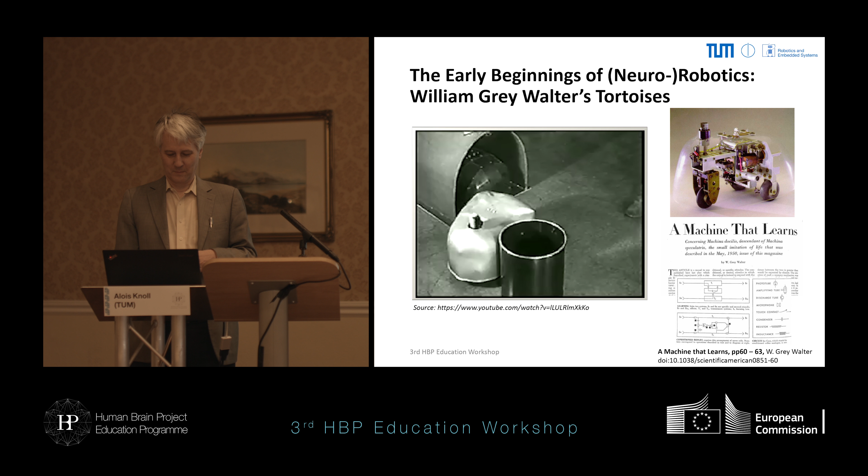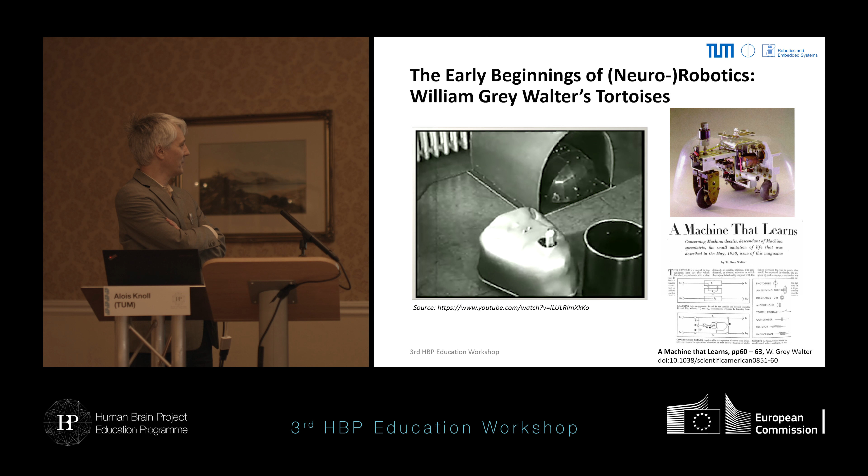This model is named Elsie, and she sees out of a photoelectric cell which rotates above her body. When light strikes the cell, driving and steering mechanism sends her hurrying towards it. But if she brushes against any object in her path, contacts are operated that turn the steering away, and so automatically she takes avoiding action. Mrs. Walter's pet is Elmer, Elsie's brother, in the darker vest. He works in exactly the same way.

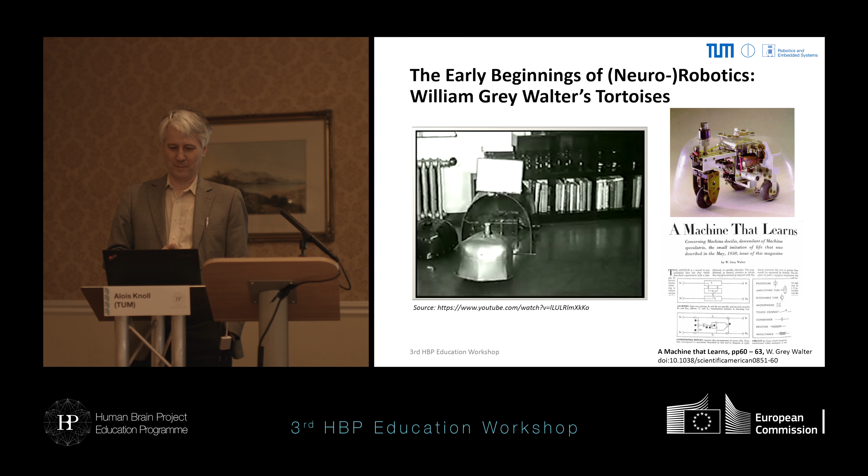What's fascinating is that Dr. Walter says that his electronic toys work exactly as though they have a simple two-cell nervous system, and that with more cells they will be able to do many more tricks. Already Elsie has one up on Elmer. When her batteries begin to fail, she automatically runs home to her kennel for charging up, and in consequence can live a much gayer life.

Okay, so this was 1955, and there is a former professor at Essex University, Owen Holland, who reproduces these as a hobby, and here you can see an Elsie with a transparent body. So that was the state 60 years ago, right? And I mean, if we want to be self-critical, we haven't achieved much more. But that's not quite true. But it's really impressive to see what he was able to do back then with a photocell and a few electron tubes. And the state of technology then.

Okay, so in 2003 then we went on, Floreano and other people did some benchmarking studies on active vision. So that means how do creatures react to visual stimuli. And today, of course, we have large-scale brain simulation, neuromorphic hardware, biomimetic robotics, and so on. If you look at the field in terms of publications, in 2000, we had like 50 per year in this field, and now it's over 700. So it's really something that's growing.

Let me give you a few examples of current research in neurorobotics. Well, first and foremost, our own stuff at TUM, which is, I think, already quite impressive. So this is a mobile robot with two cameras, onboard batteries, of course, and an 864-core SpiNNaker board, right? Of course, courtesy of Dave.

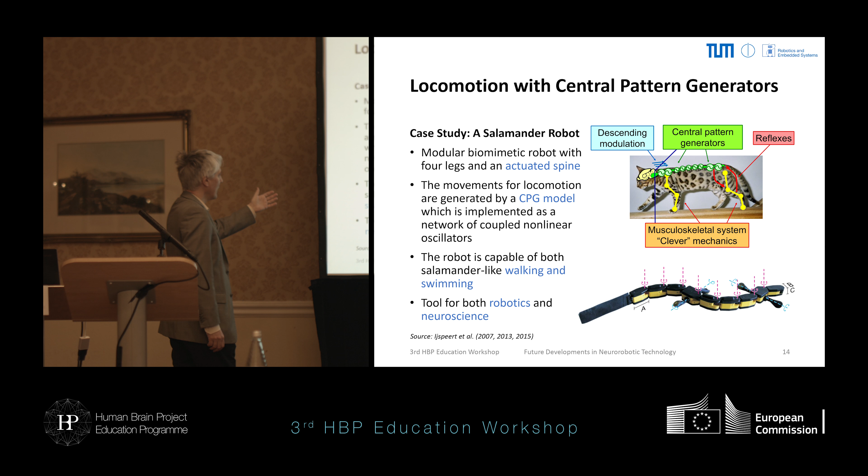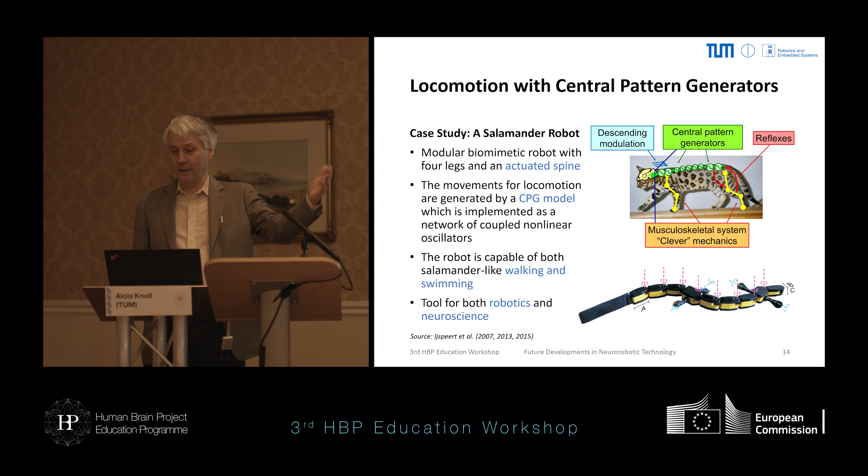And this robot is actually capable of walking, salamander-like walking, and swimming. So this could also be a very good tool. And Auke would certainly also be happy to work with you for robotics and for neuroscience. So here's a video. So here you can see this walk, and then once it gets afloat, it starts swimming in a very natural way.

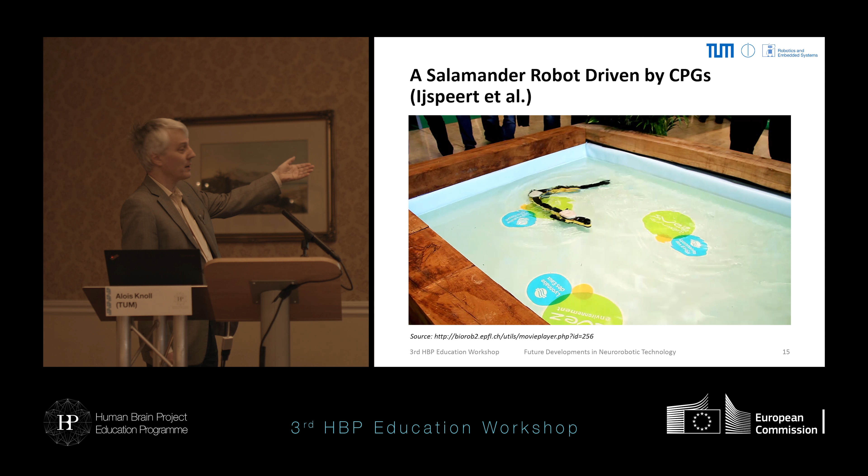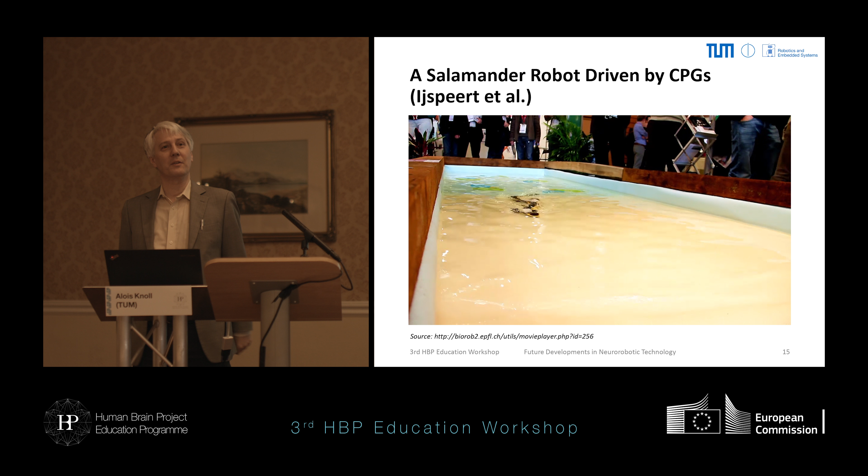I mean, if you looked at it from a few meters further away, it would be difficult to tell the difference between this one and the real one, right? As long as it's in water, and when it gets out of the water, it starts walking again. So I find this very impressive. But it's the result of 20 years of work.

And of course, then the next step would be, and we are working here with Professor Nakamura from the University of Tokyo to do a similar thing, start working on the human body and model the human body with all the muscles, all the tendons, all the bones, which he did. And the resulting model, I mean, he has lots of videos, but I wanted a particular one to present to you, but unfortunately, we couldn't get it.

Suffice it to say that this is probably the most detailed model of the human body available today. And it has 155 degrees of freedom, which I think speaks for itself. And they are adding a neuromuscular model to it, and the resulting behavior is very human-like, very impressive. So if you're interested in that, you're also more than welcome to talk to us.

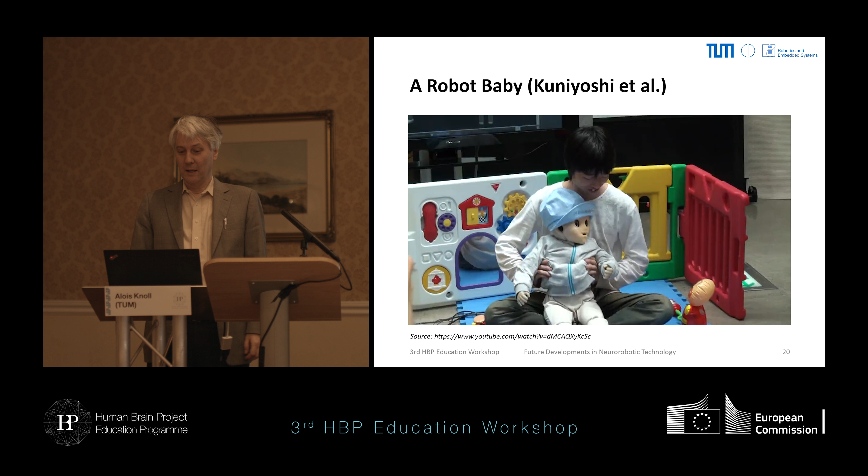So here's an example of a learning baby. This is Kuniyoshi's baby, right? You can't see this, but it has ears, eyes, and lots of sensors around the skin. And you start with an empty network, but then after a few minutes, when you touch it and there are stimuli, optical stimuli, and a bit of noise, it starts reacting. And again, if you're interested in this, I can only refer you to Kuniyoshi. Very interesting work, also a very good example of neurorobotics.

Okay, so it's SP10, our own sub-project in the Human Brain Project.

We started, as you know, with a motivation that we wanted to build more intelligent robots, like many other people, right? So we are in the mainstream of robotics development, and here are the skills that we would like to see these robots have in the future. So perception, clearly out-of-the-box navigation. You buy a robot, you unpack it, you want it to be able to navigate in your flat immediately. Of course, that's extremely difficult.

Humans, with their brains, need many, many years to arrive at the stage where you can really navigate in any hallway in the world, right? If you try to teach a robot what a hallway is, that's already quite difficult. So maybe you can train it to navigate in this particular hallway, but then you have that hallway and the whole thing fails. So that's a real challenge. Working with others, goal-oriented behavior, decision-making, and maybe one day up to the level of consciousness.

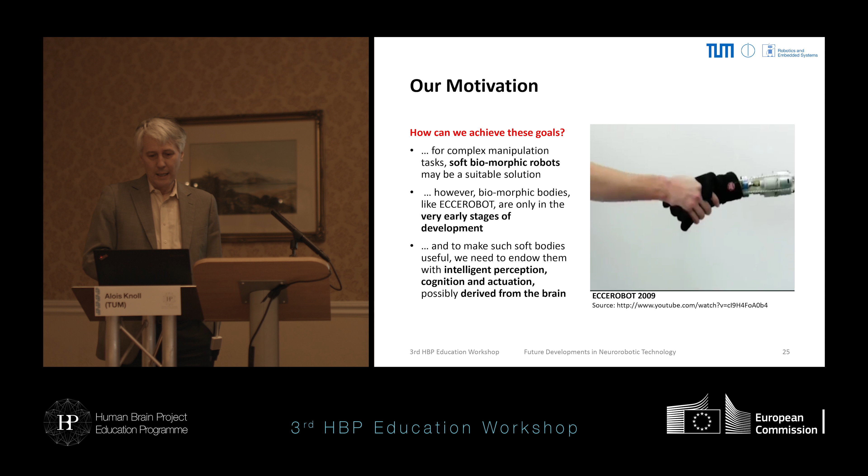And once we have an embodied robot, then we can maybe really arrive at the point where we have intelligent perception, cognition, and can really make a connection with brain research. So our mission is that we want to contribute to theory, right? I once said we want to develop a Hilbert program, in all modesty, towards the ultimate cognitive robot. But on the practical side, we would also like to design modular brains for modular bodies, because clearly you do not always want a full humanoid robot.

I mean, would it make sense to build a humanoid robot to operate your vacuum cleaner? Or might it be better to build an intelligent vacuum cleaner in the first place? Probably the second option would be the choice. But then what parts of the brain would be useful to integrate into an intelligent vacuum cleaner? Maybe a skill for navigation would be useful, but also an audition module, so that when you come in and say stop, or start cleaning now, the robot would listen to you and do what you want. So that's the question.

So the purpose, and I'll come closer to this platform aspect, is to really build an appropriate tool chain for connecting brains to robots, and this is what we are doing. So this is the tool chain. We first want to define a system that we want to control, so a body. It could be a real body, or a virtual body, like this mouse, which is our SP10 virtual mouse. Then we would define the desired level of simulation granularity, pick the model, instrument and align it, so determine the signals and actuators and motors in the body that we want to connect with our simulated brain. And then we would execute the experiment.

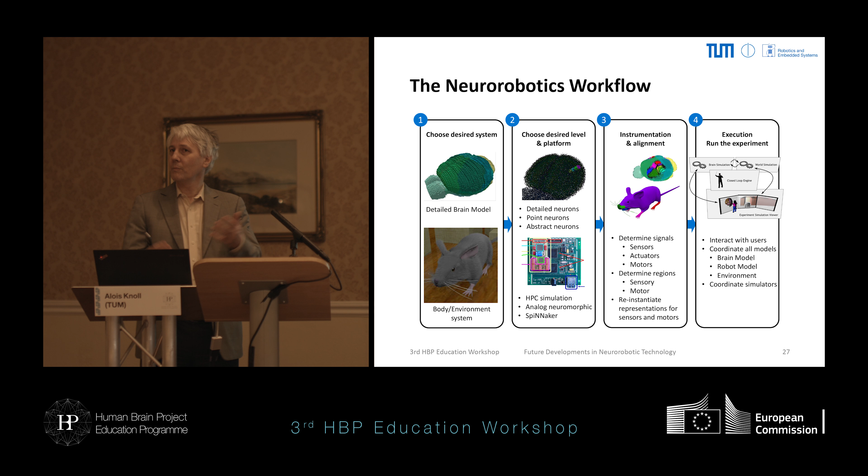It could be a scientific experiment, but it could also be something that would be useful in your household. An example of this was our first real neurorobot, the ball balancer, a very simple robot, but it has everything we need. It has a dynamic vision sensor, like the one I showed you on this mobile robot with the SpiNNaker board, a ball, 2 actuators, so only 2 degrees of freedom, very simple. But already a SpiNNaker-based controller, a SpiNNaker board with 4 chips, of which we used only 1. So there seems to be some mismatch, but it's always good to have more computing power than you need. And then, it's a Zurich sensor, yeah.

Yeah. Like on the other one, it's a silicon retina. So it's actually from the Institute of Neuroinformatics, which is a little bit ironic because it's led by Rodney Douglas, who's not a great supporter of the HBP, to say the least. But we're using the... Huh? We cooperate. Yeah, which is a positive development. So anyway, we were using this together.

I mean, this was basically Professor Conradt's work at TUM. And this is the hardware. What you don't see here is, of course, the model that we're using to control it, and this is again this Blue Brain column that Felix presented to you yesterday. We simplified this a lot.

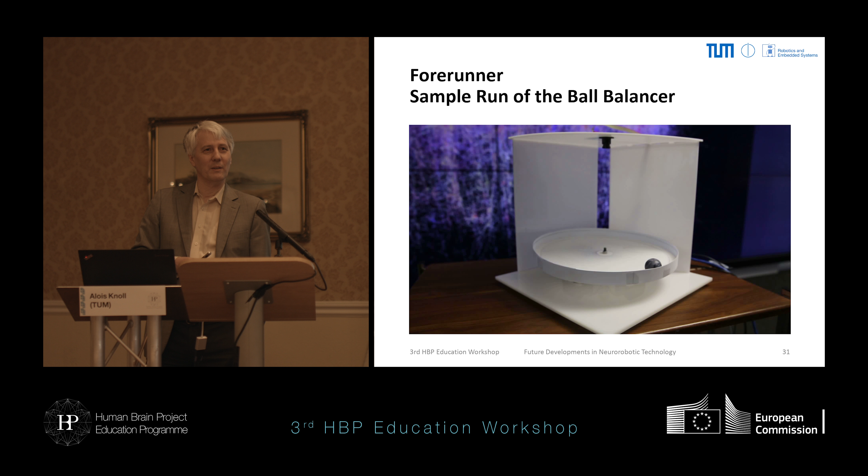And then what we did was we simulated this, right? So the task is really to balance this ball in the middle, and then here is a video of the machine. And as you can see, it learns, or it gets trained in the model, in the simulation. Then we transfer this program to the actual machine, and after a few tries, it balances. Well, of course, this runs because it's a video, but it also runs in reality, like this, so we can show you.

Okay, let me now come to the platform. What are we providing to you? What is our vision? The vision is we will give the brain models a body. And the most important metaphor is the closed loop system. So we have an input. So the system lives in an environment. As I said before, it could be a virtual environment, it could be a real environment, it could be this room. Right? So we model this room.

The robot system has sensors that pick up the information from this room. It has a certain goal, so it should develop a goal-oriented behavior, picks up the signals in this room, processes them in a certain way in the simulated brain, on the SpiNNaker system, for example, and then it translates these stimuli into action.

In other words, it drives around, it flies around, it moves around in this room, and that, of course, again changes the perception, so you have this closed loop, like we observe in almost every creature that has senses, a cognition unit, if you will, and actuators. Right? So this is our vision. We want to build these closed loop systems.

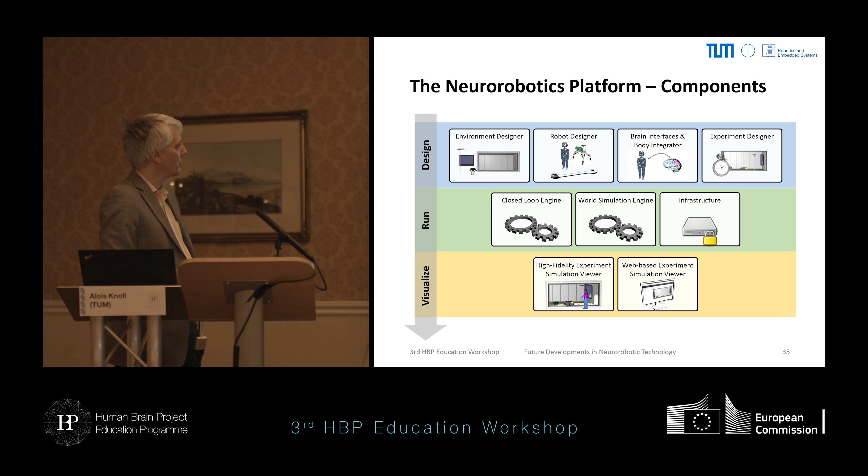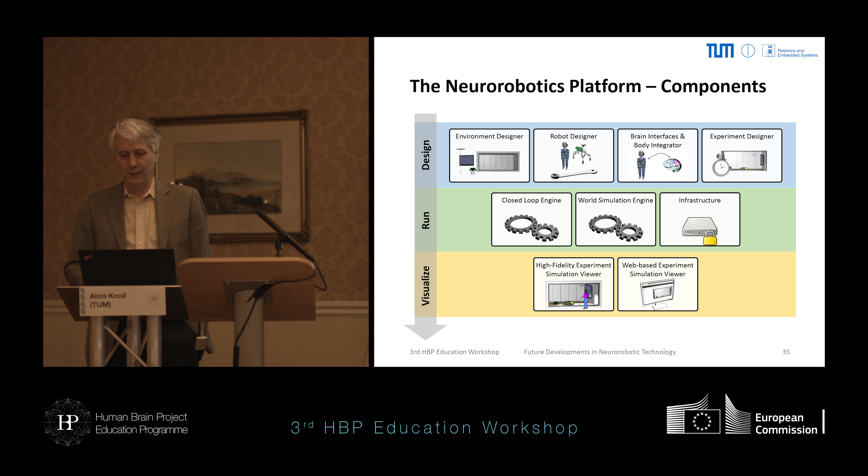An industrial robots engineer might not want to use this, but of course nobody is forced to use it. Then we have the closed-loop engine, the world simulation or the world simulator, and then a little bit of infrastructure which remains hidden from the user. And we have different kinds of viewers. So it could be, as I said, any web browser, but it can also be high-fidelity simulation viewers. We are using, for example, the video wall in Geneva as an output device.

We have a number of bodies already available. So we have a model of the iCub, which is the result of a long tradition of European projects. A lot of money has been invested into the development of the iCub, which is a robot baby. It's about this high. The development must have been around 2004 or 5. Then we have the HBP Mouse. This is a model which is not, we have better models or better visualizations of the model.

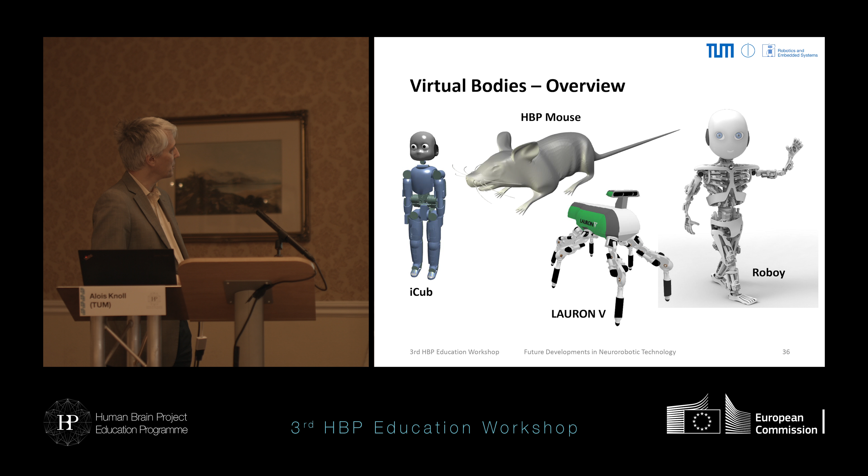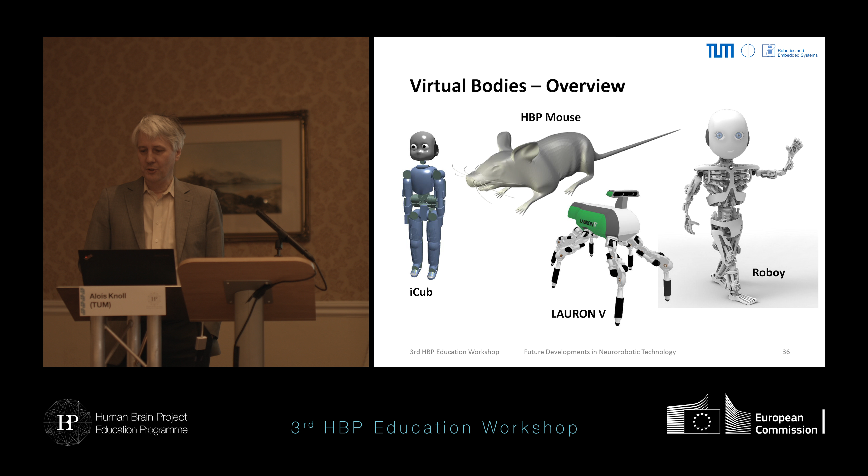We have Lauron from KIT, Karlsruhe Institute of Technology, which is a hexapod robot already in its 5th generation. That development started in the late 80s. And of course we have Roboy, the robot that we have developed together with the University of Zurich, Rolf Pfeifer, and his team.

Okay, let me give you a short overview of the HBP mouse, because this is something that is already available. So we have developed this mouse body, and we are at the moment developing a much more detailed one. This is a rather rough one, and a first 200,000 neuron mouse brain model, which was basically developed by the brain simulation people, Felix and his crew, but we are using it actually quite successfully. Here you have an image of the mouse, right? This is just the body. As I said, it's a relatively rough model.

And this is the mouse, just the body without the brain, so it does nothing, right? It just falls on the floor, but you can see that it's elastic and it has a rather natural appearance already. But as I said, we are working on much better models at the moment. So this was 2 years ago.

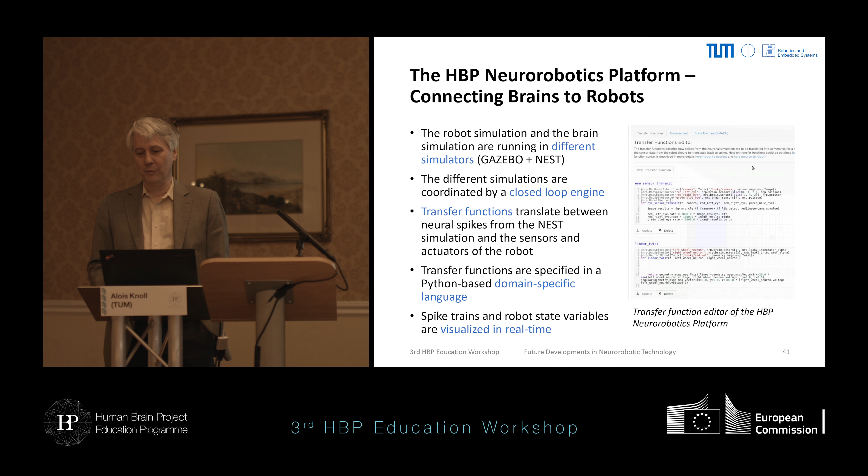For example, develop transfer functions, or first of all, even develop the concept of transfer functions with which we glue together the NEST simulation and the sensors and the actuators of the robots, because NEST in itself is just a simulator. How do you connect the simulator? And then how do you connect the simulator to work in real time, or at least in simulated real time, with the body? That's the kind of stuff that we've been working on. But now it is almost ready for release, right?

So here you have, for example, an overview of the closed loop engine as one of these things that glue together the simulators. We're using NEST for the brain. We're using Gazebo for the simulation of the robot and the environment, and we're using...

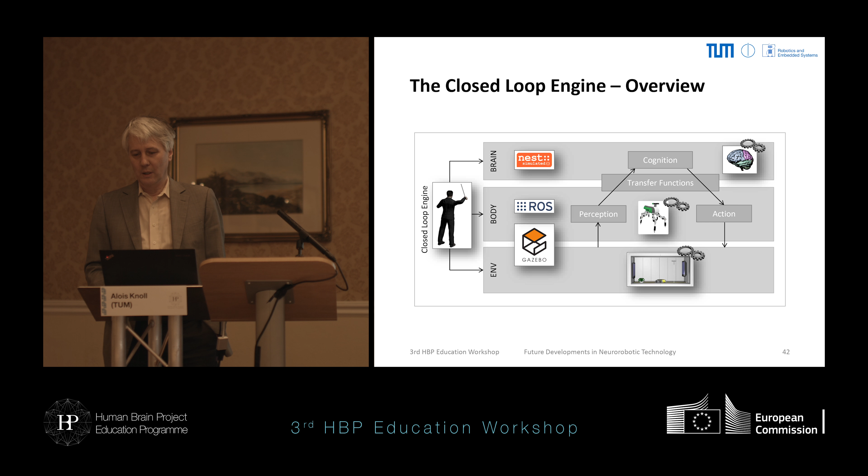We have to use ROS with all its deficiencies for running the robot system. We can use that, as I said, in the simulation, but also in the real world. So this is basically the data flow, maybe not so interesting, but we started out with a very simple example: Braitenberg vehicles, probably the simplest robot you can think of.

This has 4 wheels. It's not really very humanoid. It has 4 wheels, has 8 neurons, right? And the purpose, of course, is like with C. elegans, phototaxis, follow a stimulus, right? So we have this room. Let me show you this video briefly, but before we start, I'll explain this to you. So we have simulated this room with 2 monitors that change their color, for example.

So this is the robot, the Braitenberg vehicle, and here you can see the simulated spike trains of these 8 neurons. This is a rather coarse, rather rough simulation. We can do much better now. This was done roughly a year ago, but basically it shows you the whole environment. So we have this room. The robot roams around, looks for...

So we change the color, and then it looks for red or it looks for blue. And down here you can see 8 tracks of the spike trains, or the recordings of the spike trains of these 8 neurons. And then, of course, you're free to change whatever you want, right? So now you can change everything, every parameter in real time. You just change a parameter, and you can then observe the change in the behavior of the robot.

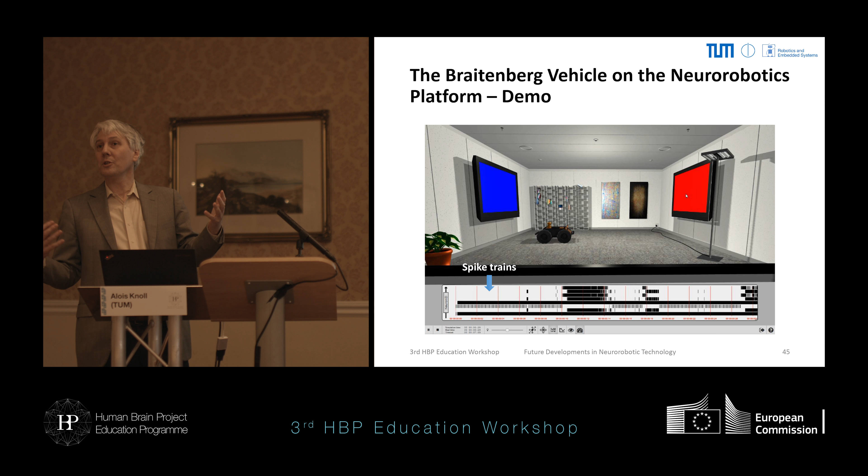So this was a year ago. Now we also have, for example, the iCub standing in that room, and this is about the achievements until last September. It's a pity that we don't have the CodeJam people here, but in Python, you can change everything. And this experiment was basically active vision on an iCub. You can change it, you can observe the eyes, you can see what it sees, everything. It's all open because it's all in simulation. You can look at everything, down to every neuron.

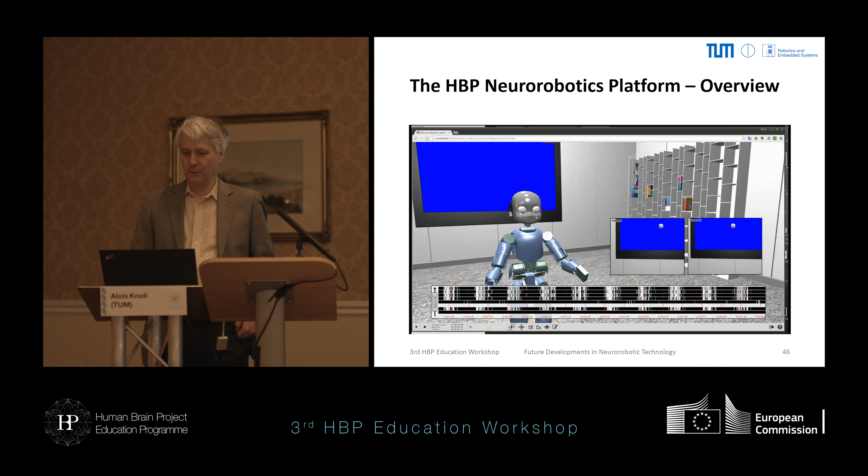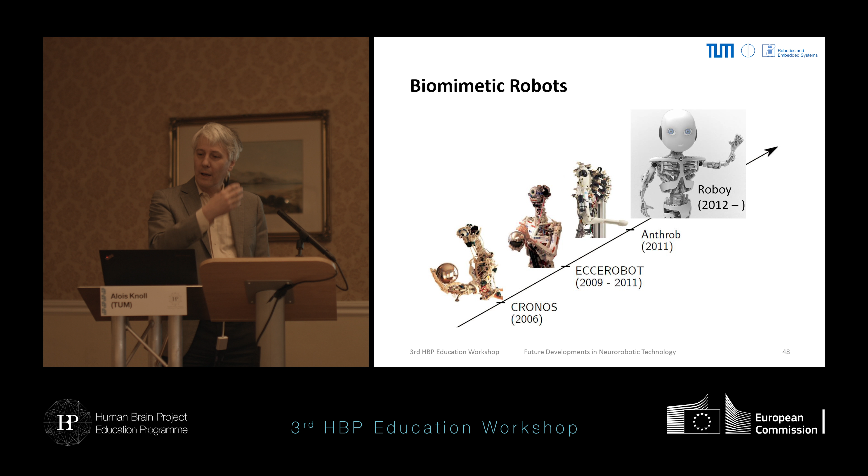So, what is the future? Well, the future is, of course, first and foremost the body development. We started with ECCEROBOT back in 2009. We're now working with Roboy and the follow-up robots. We are firm believers in this theory of embodiment, right? So the morphology of the body shapes the interaction with the environment.

A lot of computation can be offloaded from the brain if you use the right body, right? So if it has the right flexibility, the right plasticity, and so on, then there's a lot of stuff that you don't have to do in the brain because it's already done by the body, because the body adapts to the environment without any computation, right? Some people call this morphological computation.

We'll continue working on these bodies because we think that generating highly realistic data from these bodies that have these human-like dynamics makes it much easier for you and for us, of course, to arrive at better simulations, much more realistic simulations, right?

We are working on artificial muscles. This arm, by the way, is a really very unique and powerful design. We've been working on this for many years. It has a spherical joint up here, like the shoulder. It's soft. It's back-drivable.

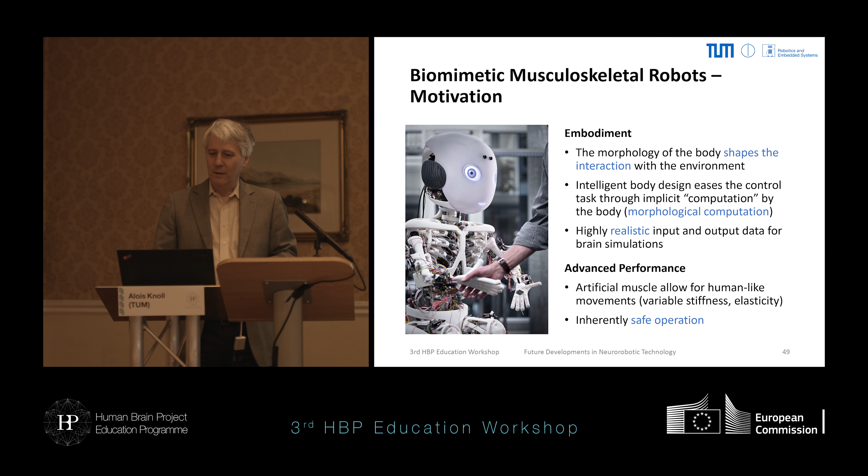We also have the models, right? For example, this one was our first model back in 2009, the Eccerobot model. It was not easy to develop simulators for these mechanisms because it's all highly non-linear. Everything else available at the time was for linear kinematics, but with these tendons in all places, it was really difficult. But you see, this thing looks quite realistic, and it actually was quite realistic.

We then went on to build the arm that I just mentioned. So this is this design, right? It's very similar to the human arm, and the motion is very smooth. It took us 2 PhD dissertations. 2 PhD students worked on this for 4 years to design the controllers. So a lot of work has gone into this, even though it looks very natural.

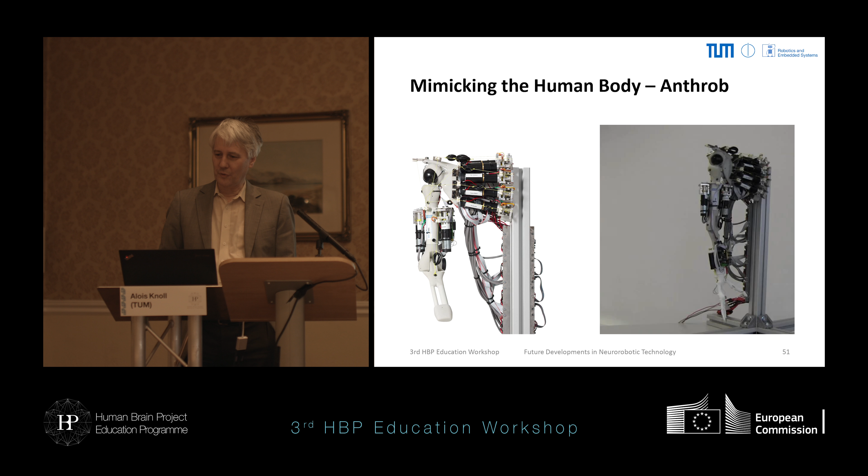But that's, by the way, also a big problem in robotics, right? The more natural it looks, the less people understand what this is all about. I can do this, so it must be easy, exactly, right? And then this all went into the development of Roboy. Here's a video of Roboy.

Most robots have motors in the joints, right? But humans obviously don't have motors in the joints, but we have muscles and tendons that are pulled over the joints. And what we try to do in Roboy is not only replicate the superficial appearance of a human being, but the inner structure with joints, bones, muscles, and tendons.

So maybe we can briefly have a look. So hi, Roboy. Of course, it doesn't answer because this is not a video, this is real. Okay, it should have said hi. Can we have a close-up on the shoulder? Hi, Roboy. It's a pleasure to meet you. Yeah, this is again this arm that I mentioned to you. Okay, very good. Unfortunately we don't have the time, so we have to stop this here.

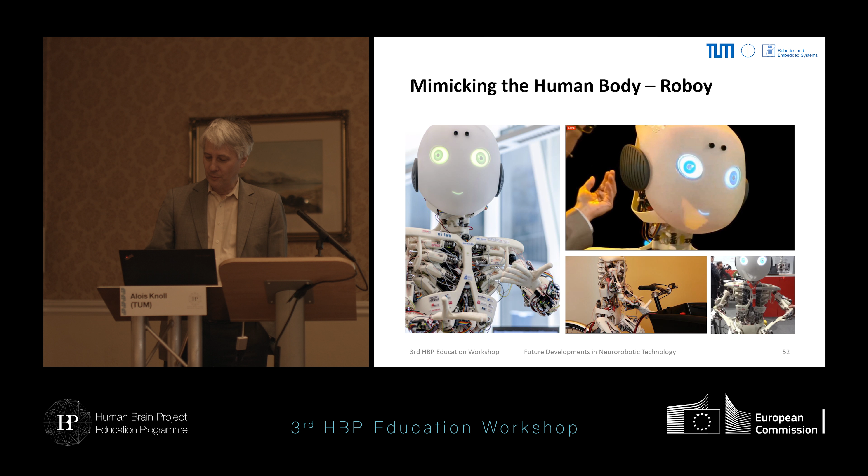But it's quite funny to watch Rolf explain the Roboy, and it's been a major success. It's been around the world. Everybody likes it. There was a show in Zurich where 200 people were actually lining up, even paying for seeing Roboy, even though it doesn't do much. There seems to be a tendency that people like these artificial creatures.

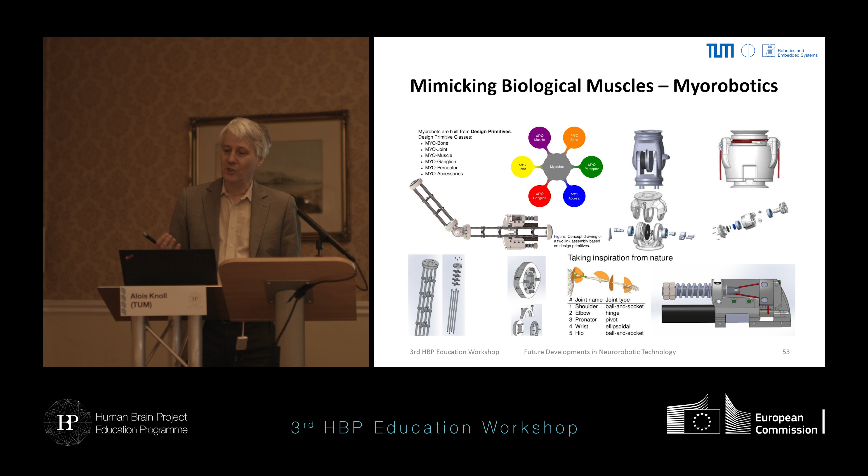So then we went on, and in the next European project called Myorobotics, we developed a kit, a modular design with which we can build all kinds of bodies. For example, this one. It's actually a very simple mechanism with only 1 degree of freedom, but you can change the elasticity, basically every parameter, and do interesting experiments. You can even use it as a catapult. It's so soft, and you can throw a ball.

You can build a thing like this, a quadruped, which of course is too heavy to walk, but at least it can show off the different sorts of gaits and so on. But this was also 2 years ago. We are much better than this now.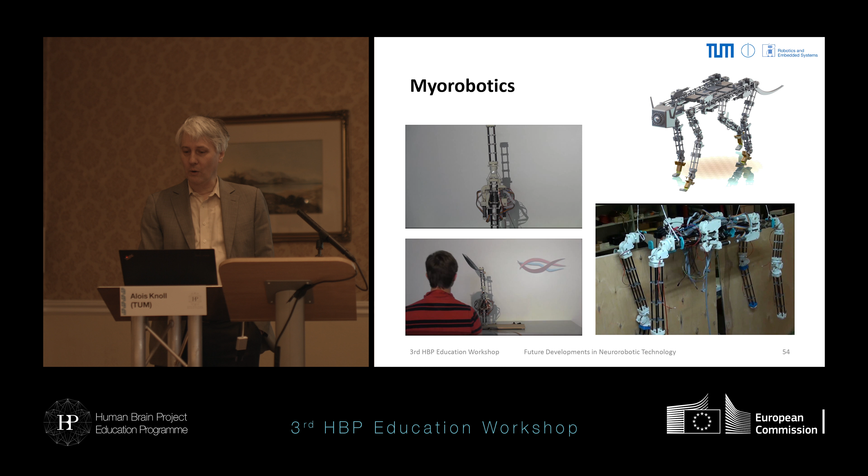So the intermediate summary is we have these bodies, we are working on them. We think that musculoskeletal robots are ideal and even essential for meaningful interaction with the environment. They are a good basis for brain simulations, or for acquiring data for brain simulations, and for applying what we know about the brain using artificial controllers in robots. They are ideal for us as supporters of this metaphor of embodiment. And we can add special features like variable stiffness, inherent compliance, and so on.

But the problem is classical control algorithms are not suited, they are not available. So we have hope, because we're using what we know about the brain for controlling these bodies, but it's a long way to go. And of course, appropriate learning techniques are required, and that will be my last chapter in the last 5 or 10 minutes.

What are we going to do about learning? Well, we are working on learning. Florian Walter, my PhD student, who unfortunately couldn't come here, is the head of this learning group. We need the learning. But the problem is, what we have at the moment with all the deep learning and stuff is not enough for us.

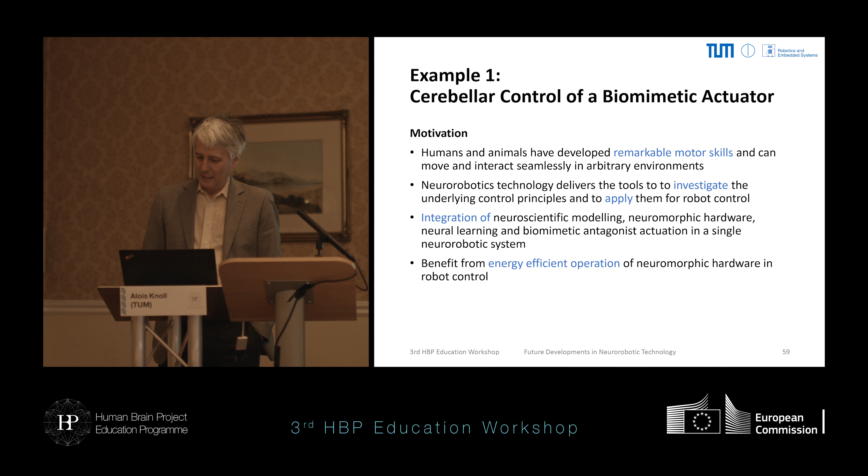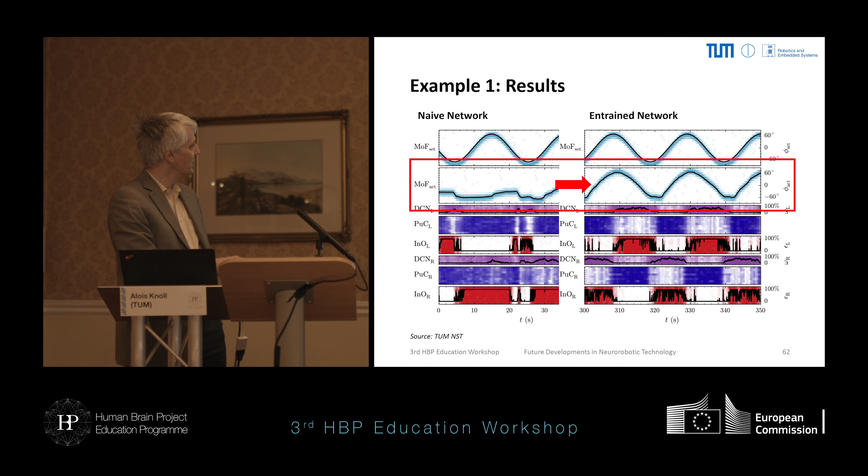Unfortunately, I'm already 1 minute behind schedule, so I should be quick. Just as an overview, we're using a model developed by the University of Granada, Eduardo Ros. I can't go into detail, but clearly this is a closed loop system. And if you look at the arm, this is the set point over time, the profile that we want. We want to move it like a sine wave, and this is the actual movement in the beginning. We can look at all the signals in the cerebellum, like I showed you with the iCub.

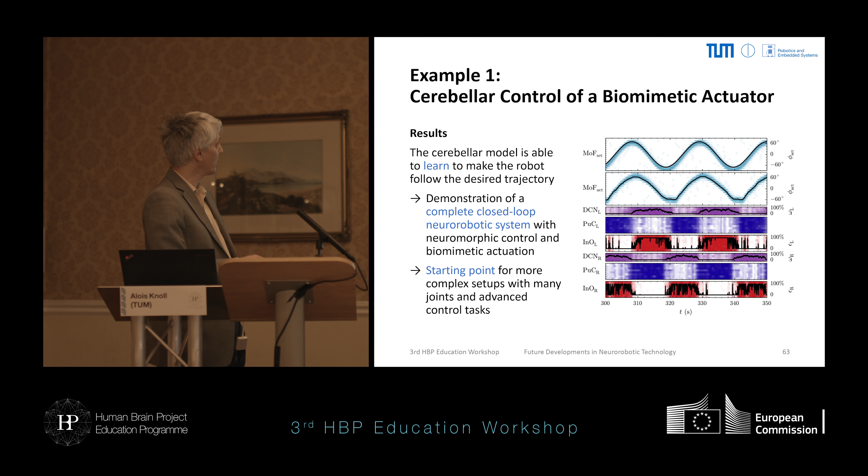The end result is that, of course, the cerebellum is able to learn. This is also a very simple task. I don't know whether you really need 250,000 neurons for that, but again, here you have the spike train of some of where we put some needles in, some virtual needles, and then you can see over time that it really starts learning and that it then learns, right? So successfully. Again, this is a video, but it really works also in practice.

Second example, and then I'm almost finished, so don't worry, is the so-called differential extrinsic plasticity. We're also working with Professor Der from Leipzig University, who's been working on this for 25 years. So here the question is really how can we profit from the fact that we know that we are embodied and we have lots of sensors in our skin for controlling a robot system using all the external input, right?